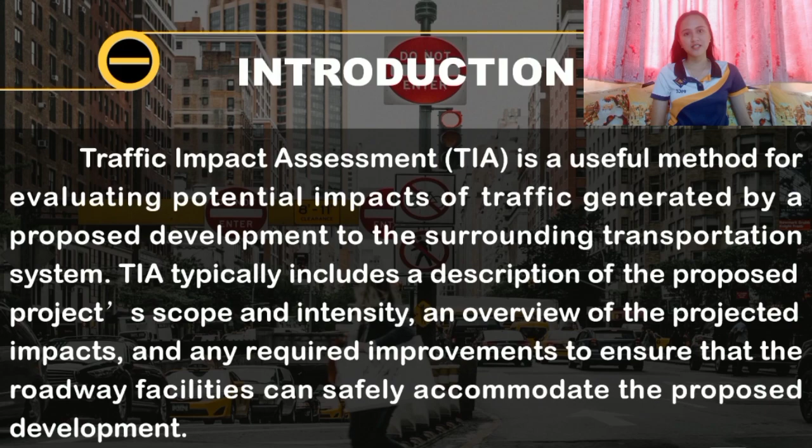A well-prepared TIA helps the developer and permitting agency update traffic data, relate land use decisions to traffic conditions, utilize money allocation more effectively, and estimate the traffic impacts of a proposed development by creating reasonable future traffic volumes for design purposes.

It also helps assess whether modifications are required to accommodate background traffic as well as traffic from a projected development, and lastly, provides a basis for determining the developer's responsibility for specific off-site improvements.

So a well-prepared TIA serves as a comprehensive tool for assessing and addressing the potential traffic implications of a development, promoting safety, compliance, and efficient use of transportation infrastructure.

The main objective of traffic impact assessment is to determine whether a certain development project will have an effect on the efficiency and safety of adjacent roads. It lays the path for further investigation and development of traffic management plans that help minimize traffic congestion.

The TIA considers not only traffic impacts such as road network efficiency and safety, but also the impacts on all road users, including public transport users like pedestrians and cyclists. The TIA considers both impact on operations and physical impacts on transport infrastructure.

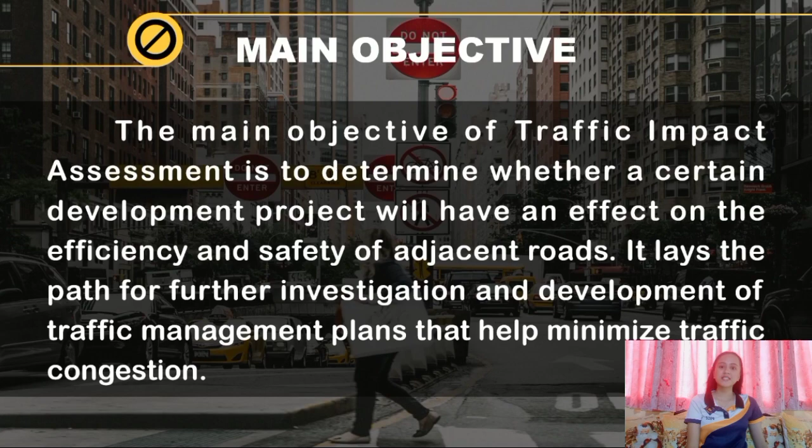Any development needs to have adequate infrastructure to support it, whether utilities or transportation. As a result, every proposed development requires an assessment of the adequacy of the site and any necessary improvements to safely accommodate the proposed development.

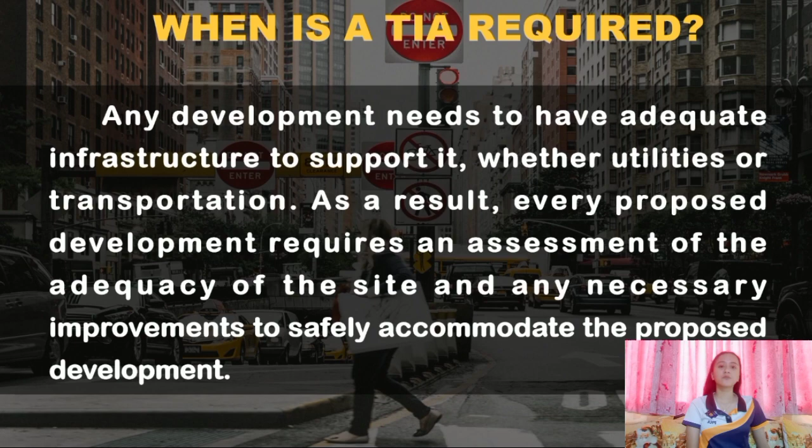In general, there are two levels of assessment that may be required in support of a development. The comprehensive report, which is used for larger developments with significant traffic impacts or at complex locations where the recommended improvements require a detailed analysis.

And the memo report, which may be used for small developments with low traffic impacts at simple locations where the recommended improvements can be assessed in a memo format.

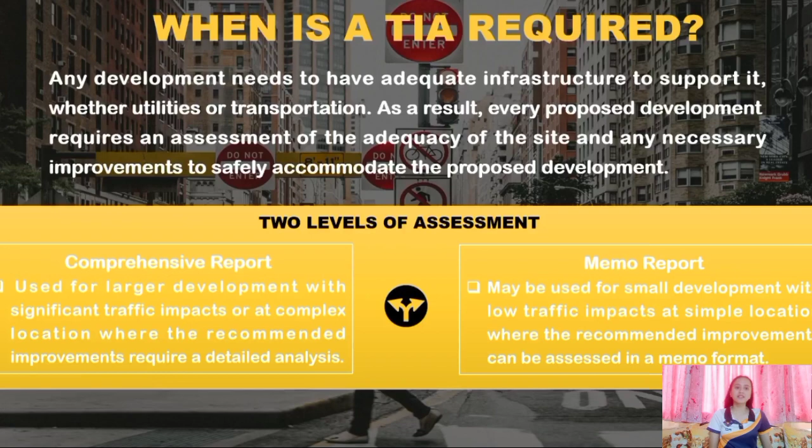Typically, a subdivision, pre-development plan, or development that potentially generates high traffic volume requires a comprehensive TIA, while if the anticipated traffic impact is low, a memo report may be sufficient.

Before a developer can make adjustments to a municipality's land use, subdivision, site, or driveway plan, a TIA must be submitted. If a TIA is not required, it is at the discretion of the city or municipal planning development office to mandate a traffic operation study to address local transportation issues.

To obtain specific TIA requirements, developers must engage with the relevant agencies, which include the Department of Public Works and Highways, the Department of Transportation and Communication, the Metro Manila Development Authority, and the local government unit.

As the TIA is often conceptual in nature and relies on many assumptions, its assumptions may need to be verified from time to time when new or additional information becomes available.

The acceptance of a TIA should not be viewed as final, as subsequent updates to the TIA may be required. Since the TIA is a technical document that other studies and approvals rely on, it needs to be as accurate as possible. A TIA outlines engineering judgments and recommendations.

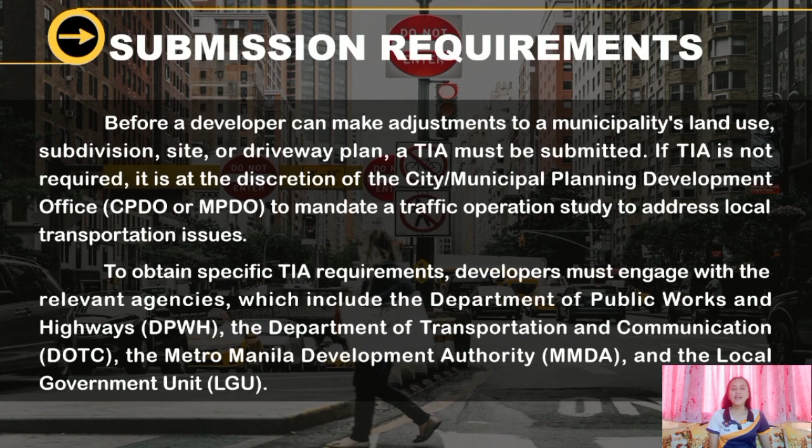Therefore, a TIA must be signed off by a qualified professional transportation engineer. An unsigned TIA is not acceptable and will not be reviewed.

Traffic impact assessment involves a systematic process to evaluate the potential impact of a proposed development on the existing transportation infrastructure and traffic conditions.

It involves site visits and base data collection, like traffic counts, pedestrian counts, road measurements, sight distances, traffic speeds, sidewalks, and street lighting.

It defines the study area and road network within the study area, assesses the existing traffic and road safety conditions on the road network in the study area, reviews the development or change in road network that will result in change in traffic flows, estimates the volume of traffic that the new development will generate and distributes this traffic onto the surrounding road network, adds the additional traffic to existing traffic and assesses the impact.

It assesses the impact of this additional traffic on the road network within the study area, calculates the forecast traffic volume, adds the additional traffic to the forecast traffic and assesses the impact, establishes the mitigation measures required to address the impact of the additional traffic for existing and forecast traffic conditions.

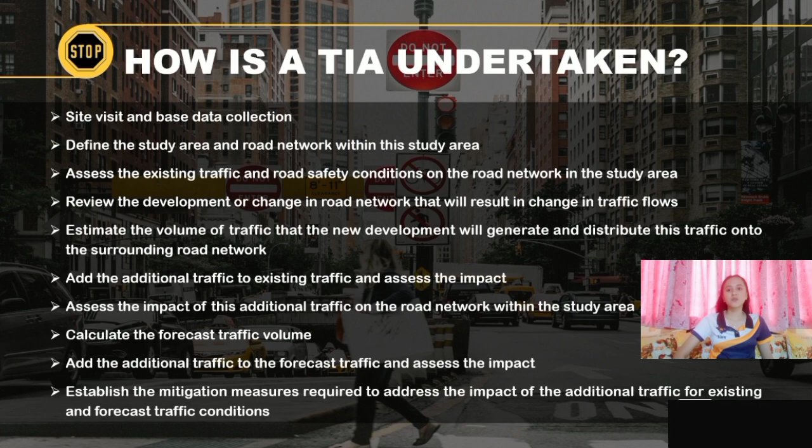It's essential to note that the requirements for a TIA can vary based on local regulations and the nature of the proposed development. Consulting with local planning authorities and transportation agencies is crucial to ensure compliance with specific guidelines and requirements in a given jurisdiction.

Land use is under municipal jurisdiction. Therefore, all TIA correspondence should involve the municipality. This ensures that any decisions or changes related to land use can be properly addressed and regulated by the local governing body. It also helps maintain consistency and accountability in managing land development projects within the municipality.

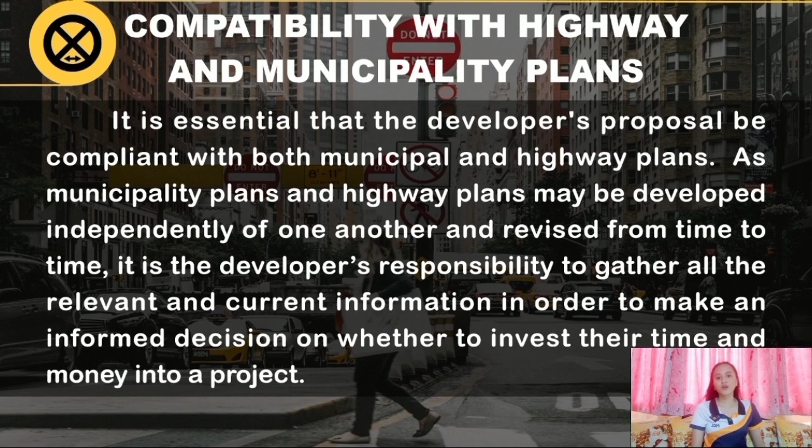It is essential that the developer's proposal be compliant with both municipal and highway plans. As municipality plans and highway plans may be developed independently of one another and revised from time to time, it is the developer's responsibility to gather all the relevant and current information in order to make an informed decision on whether to invest their time and money into a project.

It is advised that before starting any TIA work, the required scope, acceptability of the access locations, assumptions, methodology, expectations, and requirements be determined in order to prevent doing any needless work. A scoping meeting with the municipality would be helpful to discuss the proposed development plan to determine whether a TIA is required or not and the scope of the study for the upcoming TIA.

The developer and its consultant should discuss whether the municipality is willing to consider changing the usage of an existing access or creating a new one.

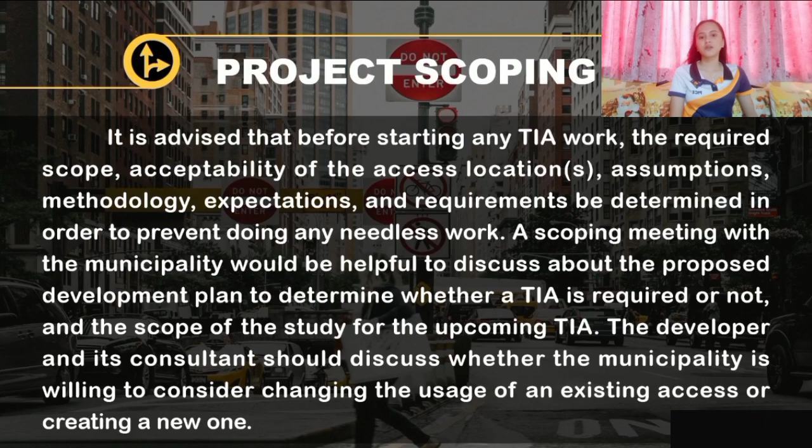As a TIA is often based on many assumptions, to achieve an acceptable TIA while minimizing the number of revisions, all such assumptions should be agreed to by the reviewing parties before conducting the TIA. The reviewer may have a certain preference or limitation in regard to analysis tools that should be confirmed as well.

The report should be concise, organized in a step-by-step approach, and easy to verify and comprehend. Any assumptions must be justified and backed up by sufficient evidence. The suggested study format will help ensure consistency among various studies and help enhance the efficiency of the report review process.

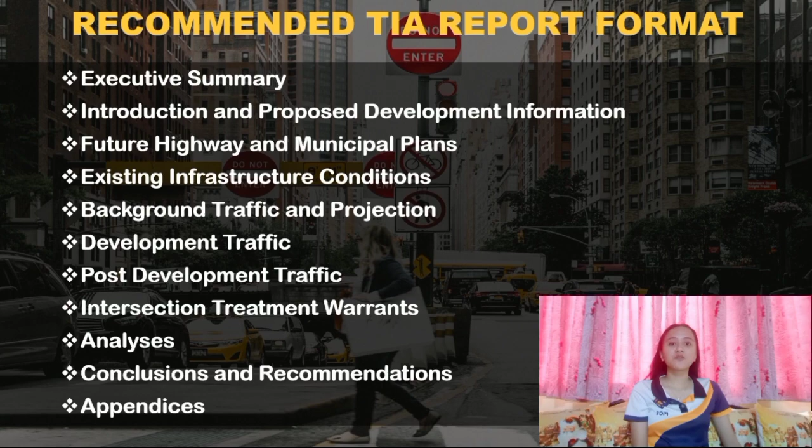The format includes an executive summary, introduction and proposed development information, future highway and municipal plans, existing infrastructure conditions, background traffic and projection, development traffic, post-development traffic, intersection treatment warrants, analysis, conclusions, and recommendations, including the proposed intersection plans, appendices, scoping and supporting documents, calculations, correspondence, etc.

The report content will be discussed further by my groupmates.

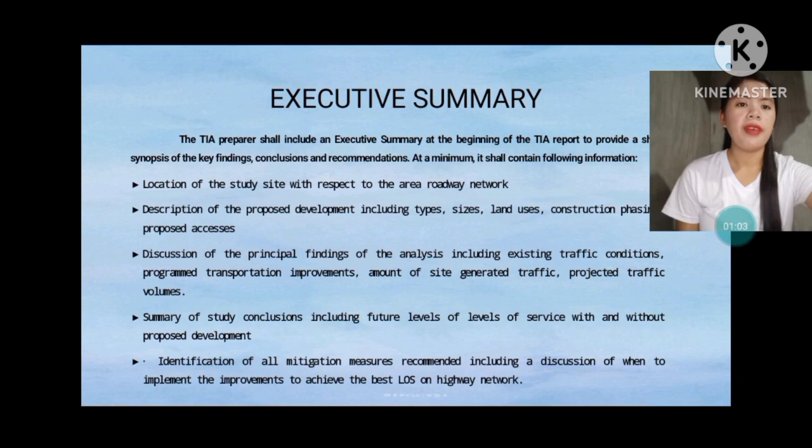Third is the discussion of the principal findings of the analysis, including existing traffic conditions, programmed transportation improvements, amount of site-generated traffic, and projected traffic volumes.

The fourth one is the summary of the study conclusions, including future levels of service with and without proposed development. Then, identification of all mitigation measures recommended, including a discussion of when to implement improvements to achieve the best level of service on the highway network.

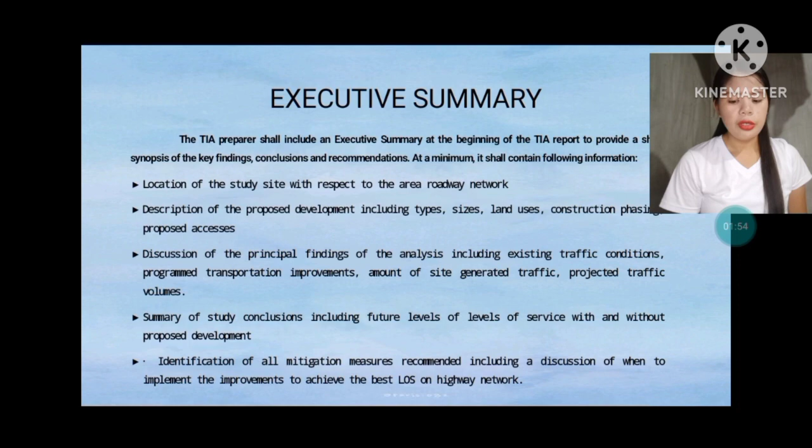When we say LOS, it means level of service, which is widely used in transport planning to evaluate problems and potential solutions. It also influences transport planning decisions.

Next is the introduction and proposed development information. The introduction of background information is to provide understanding of the proposed development and its location with respect to the provincial highway system. This portion of the report should provide the following information.

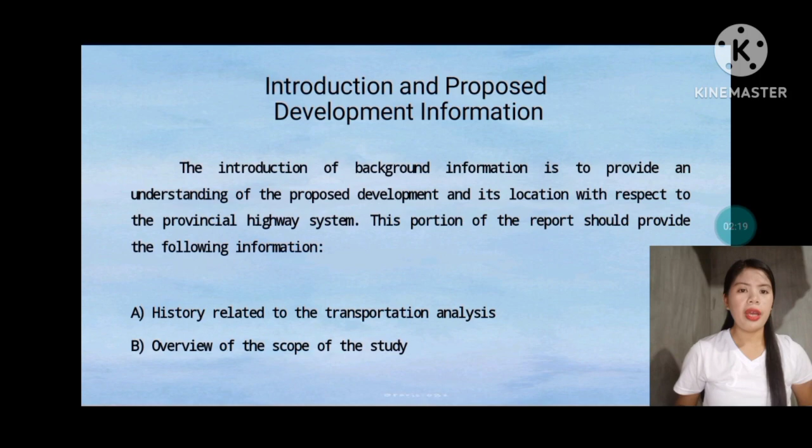A is the history related to the transportation analysis. Transportation analysis provides the basis for transportation planning. B is the overview of the scope of the study.

A Traffic Impact Assessment, or TIA, is a study that evaluates the effects of a proposed development or land use change on the surrounding transportation network.

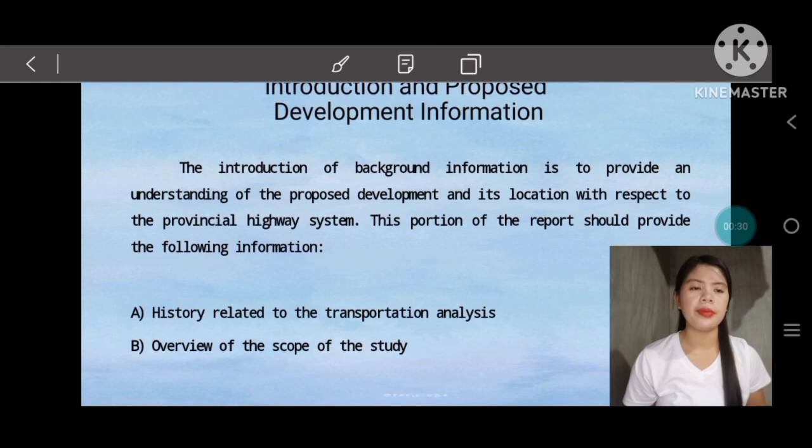Letter C, proposed development. In this part, there are two subcategories of proposed development: first is the on-site development, and second is the study area. Under on-site development is the name and location with legal land description of the proposed development.

The legal description identifies the property's geographic location and boundaries as determined by a surveyor. It also ensures that the correct property deed is transferred to the new owner and that the correct property ownership is recorded on the new deed.

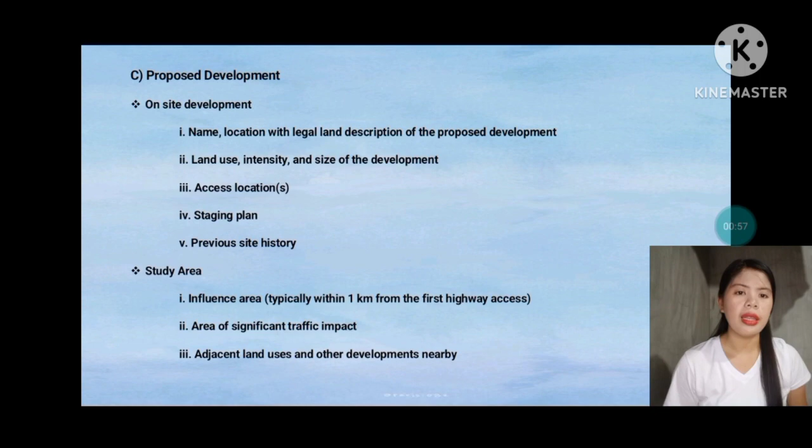While in the study area, we have the influence area, typically within 1 kilometer from the first highway access. Second is the area of significant traffic impact. And the third one is the adjacent land uses and other developments nearby.

Letter D is the existing road network. So the highway number or the control section and kilometer. Second is the highway service classification.

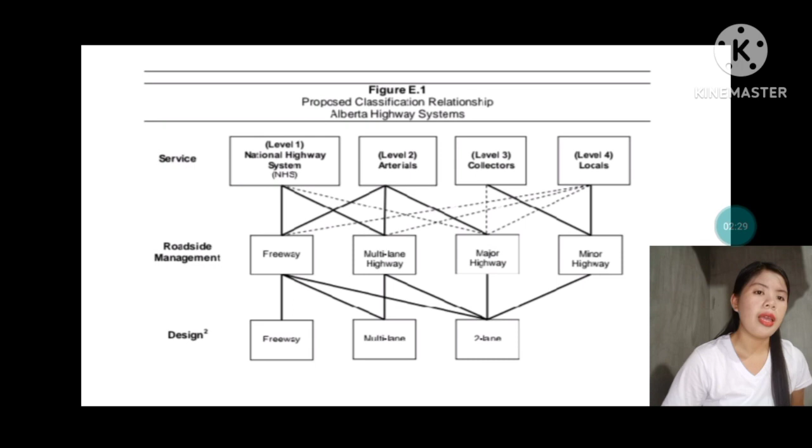For the design of roadside management, the freeway is under freeway, multi-lane, and two-lane. For the roadside management multi-lane highway, it is under multi-lane and two-lane design, while the major highway is only under two-lane, same as the minor highway of roadside management.

As you can see in the picture, we have a sample of a roadside management classification map.

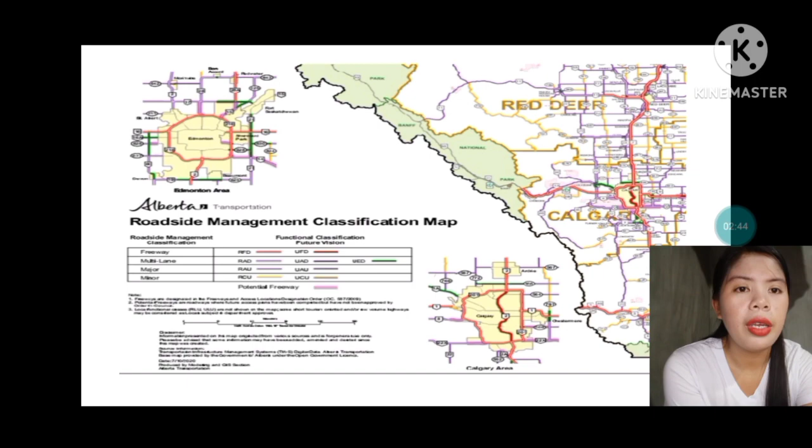So for letter E, maps and plans, we have two plans: the site location plan and the site plan. We have an example picture here.

As you can see, the difference between the location plan and the site plan: a location plan must be based on an up-to-date map and at a recognized standard metric scale, and must illustrate the plan development in relation to its adjacent properties. This is the sample picture.

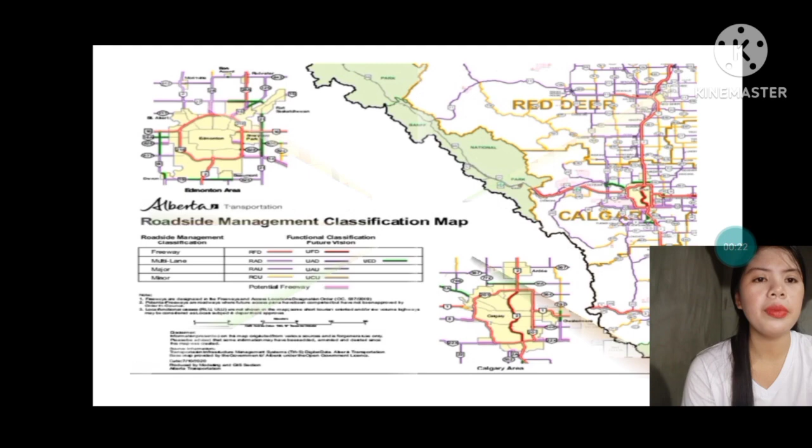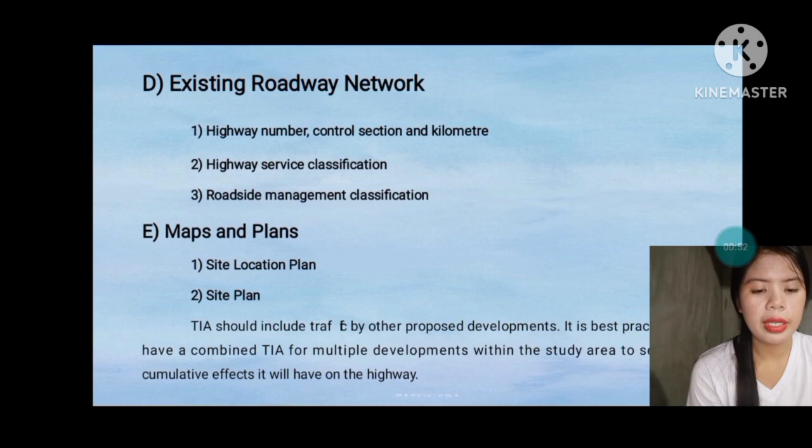The site plan, also known as block plans or plot plans, shows the intended development location in respect to the property boundaries. They are most often submitted in either a 1:200 or 1:500 scale. Here is the sample picture, these two. Site plan at 1:500 scale.

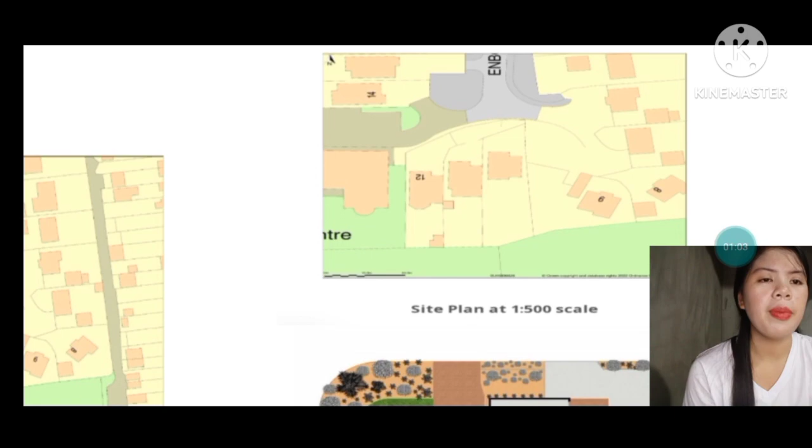For access management, highway and municipal: access management is the planning, design, and implementation of land use and transportation strategies that control the flow of traffic between the road and surrounding land.

A TIA is not only an operations assessment, but also a planning exercise. All development plans need to be compatible with the municipality and highway plans. Understanding the existing and future plans within the study area is essential to evaluating the impacts of the development site.

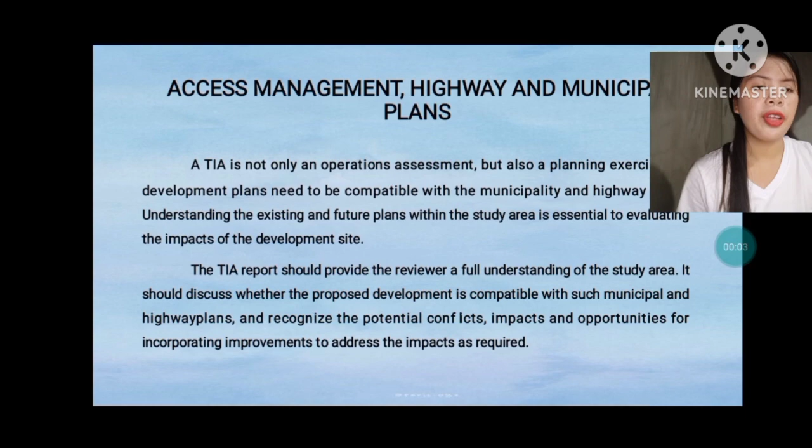The TIA report should provide the reviewer a full understanding of the study area. It should discuss whether the proposed development is compatible with such municipal and highway plans, and recognize the potential conflicts, impacts, and opportunities for incorporating improvements to address the impact as required.

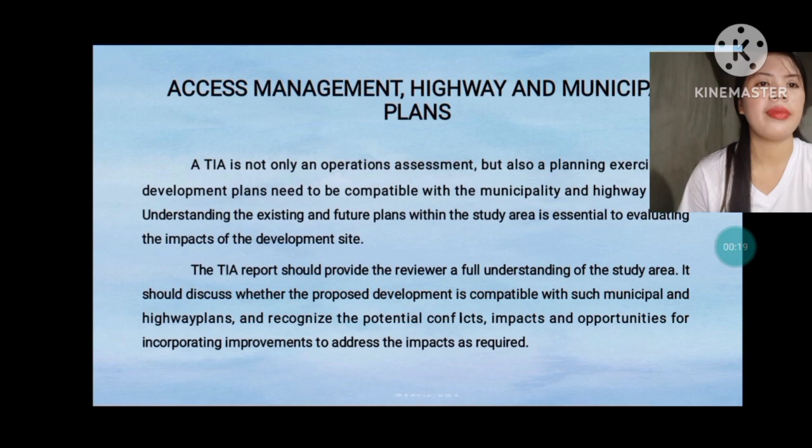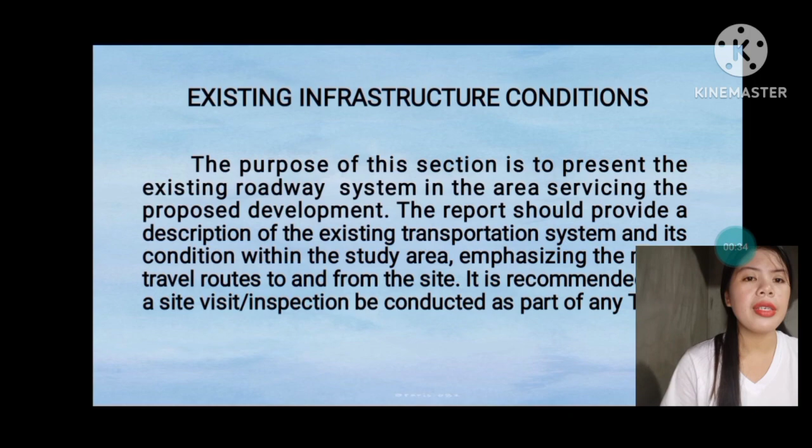In the existing infrastructure condition section, the purpose is to present the existing roadway system in the area servicing the proposed development. The report should provide a description of the existing transportation system and its condition within the study area, emphasizing the major travel routes to and from the site.

It is recommended that a site visit or inspection be conducted as part of any TIA.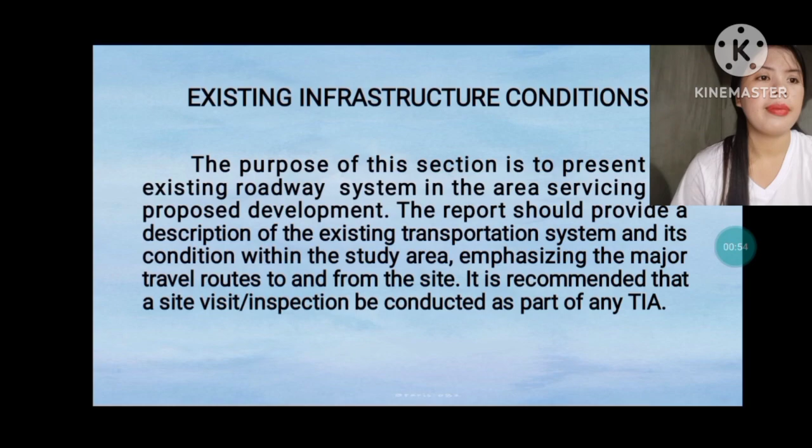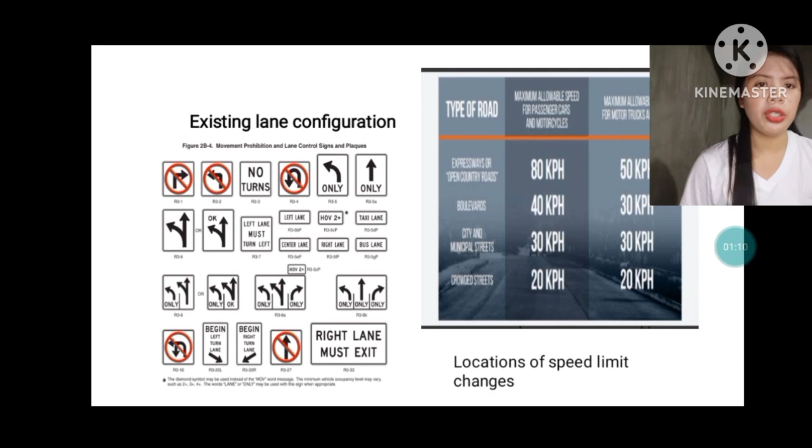Existing highway and road conditions: we have the existing lane configurations. Let me show you the picture. Here, the first picture, as you can see, there were signs for the existing lane configuration.

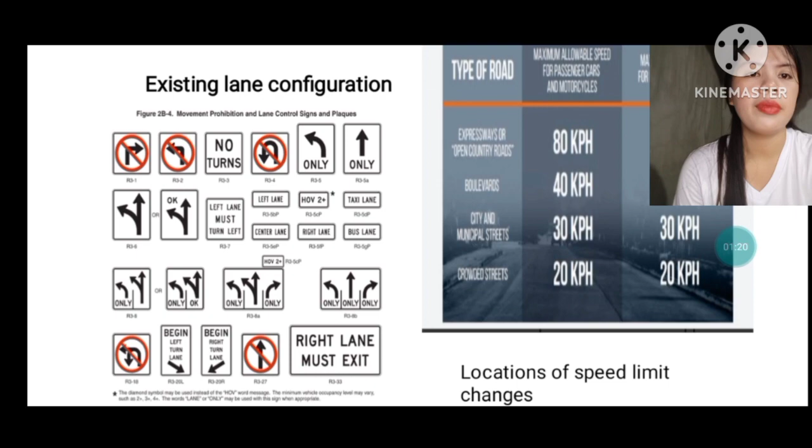Design and posted speed limit of the highway and the intersecting roadway. Then, the location of speed limit changes.

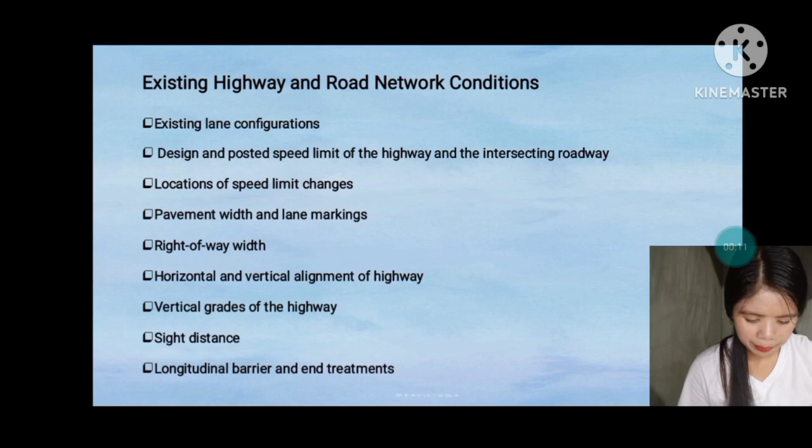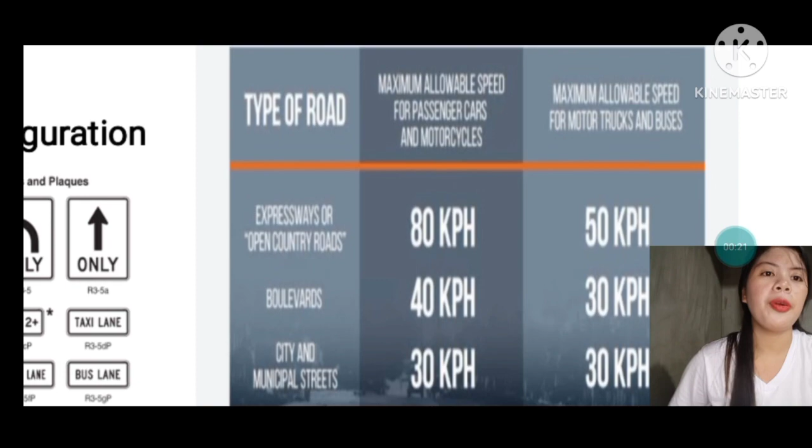So here we have the type of road, the maximum allowable speed for passenger cars and motorcycles, and the maximum allowable speed for motor trucks and buses. When it comes to expressways or open country roads, 80 km per hour is the maximum allowable speed for passenger cars and motorcycles, while 50 km per hour for motor trucks and buses.

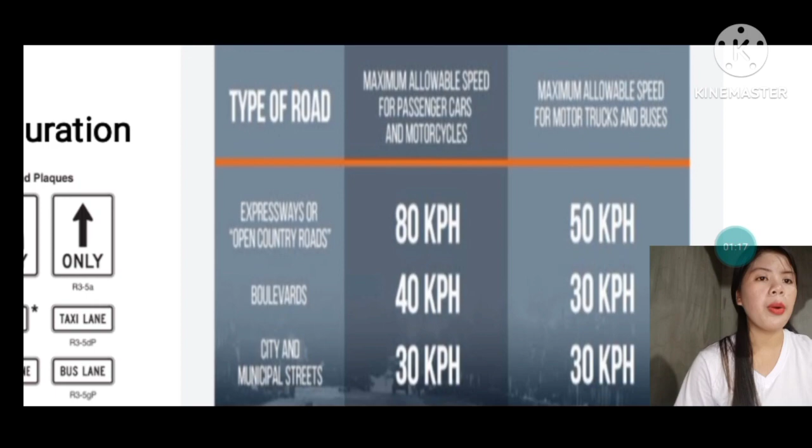When it comes to boulevards, the maximum allowable speed for passenger cars and motorcycles is only 40 km per hour, while for motor trucks and buses it's 30 km per hour. When it comes to city and municipal streets, it's 30 km per hour for passenger cars and motorcycles, and 30 km per hour for motor trucks and buses.

For the locations of speed limit changes, the speed limit zone area becomes effective at the point you reach the sign. If the speed limit sign or zone changes to a slower speed, slow down before the sign and not after. If the speed limit changes to a higher speed, wait until you get the increased speed limit sign before increasing your speed.

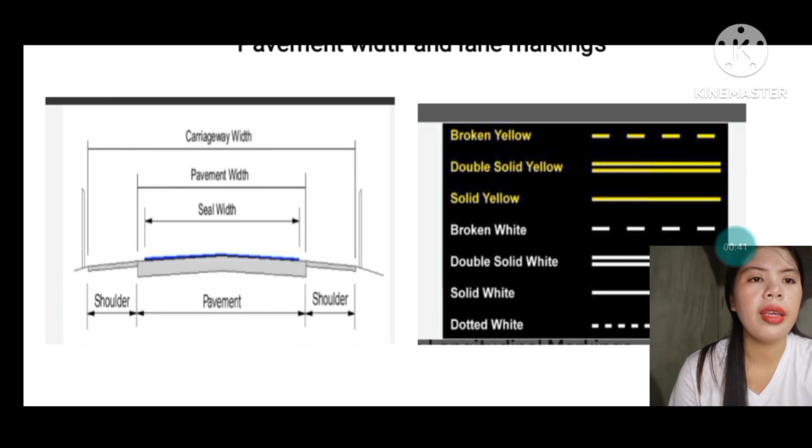Next is the pavement width and lane marking. We have pictures here showing two things: one for the pavement width and one for the lane markings. You can see the pavement width at the middle of the carriageway width and the seal width, and both sides is the shoulder.

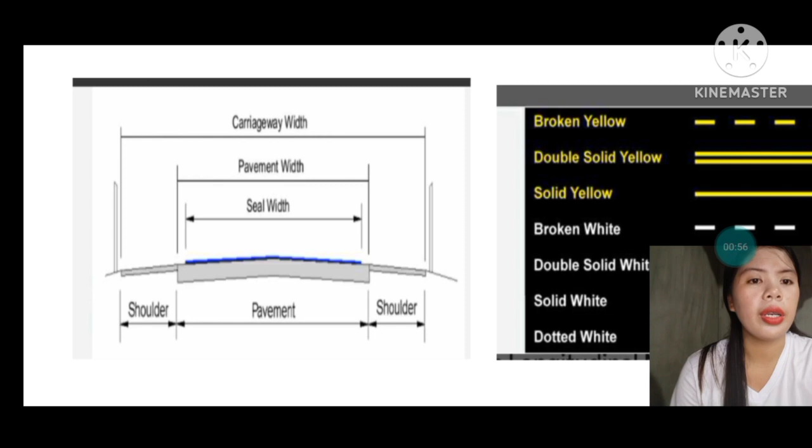For the lane markings, we have the broken yellow, double solid yellow, broken white, double solid white, and dotted white lines. A solid yellow line indicates that passing is prohibited. A dashed yellow line indicates that passing is allowed, while white lines separate lanes for travel in the same direction. A double white line indicates that lane changes are prohibited, while a single white line indicates that lane changes are discouraged.

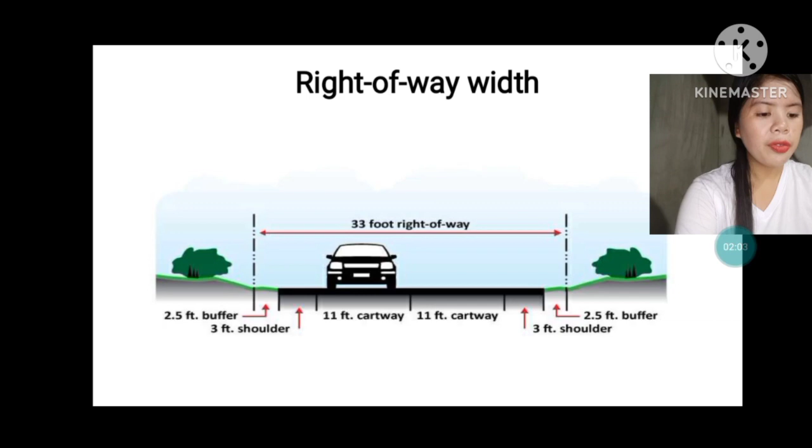Next is the right-of-way width. As you can see in the picture, we have a 33-foot right-of-way. The width of the right-of-way in the Philippines, according to the National Road, shall have a right-of-way not less than 20 meters, provided that such minimum width may be reduced at the discretion of the Minister of Public Highways to 15 meters in highly urbanized areas.

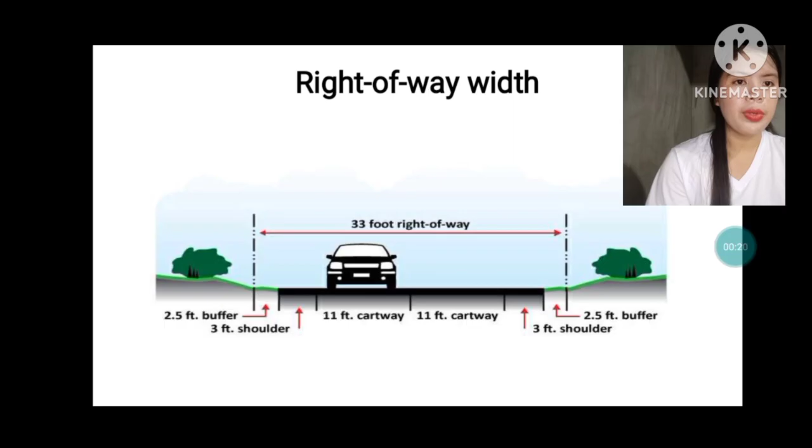And that a right-of-way of at least 60 meters shall be reserved for roads. Next is the horizontal and vertical alignment of highway. As you can see in the picture, we have the horizontal alignment in plan view and the vertical alignment in profile view. The horizontal alignment of a roadway is defined in terms of straight line tangents and horizontal curves. The curves allow for a smooth transition between the tangent sections. Circular curves and spirals are two types of horizontal curves utilized to meet the various design criteria.

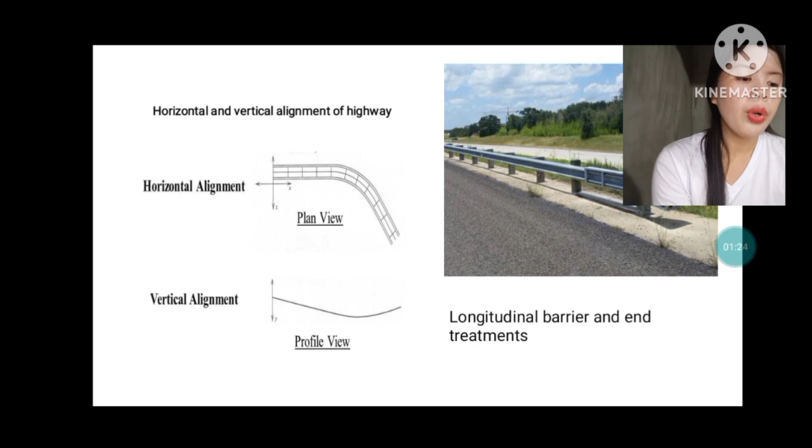For the vertical alignment of the highway, it is generally defined as the presence of height and depth in the vertical axis with respect to the horizontal axis of alignment. These heights and depths in roads may be in the form of gradients, or straight lines in a vertical plane, or vertical curves.

Then for the vertical grades of the highway: the vertical profile grade is the percent of elevation change along the center line of the roadway. Vertical grades are necessary to assure drainage of storm water within the plaza to inlets and or outfall locations. Vertical curves, also known as grade curves or sag curves, are gradual changes in the slope of a roadway or railroad track along the vertical axis. They are used to transition between different grades or slopes smoothly and safely.

For the sight distance, this is already very familiar to us since our teacher already discussed this one. Stopping sight distance is one of several types of sight distance used in road design. It is a near worst-case distance a vehicle driver needs to be able to see in order to have room to stop before colliding with something in the roadway, such as a pedestrian in a crosswalk, a stopped vehicle, or road debris.

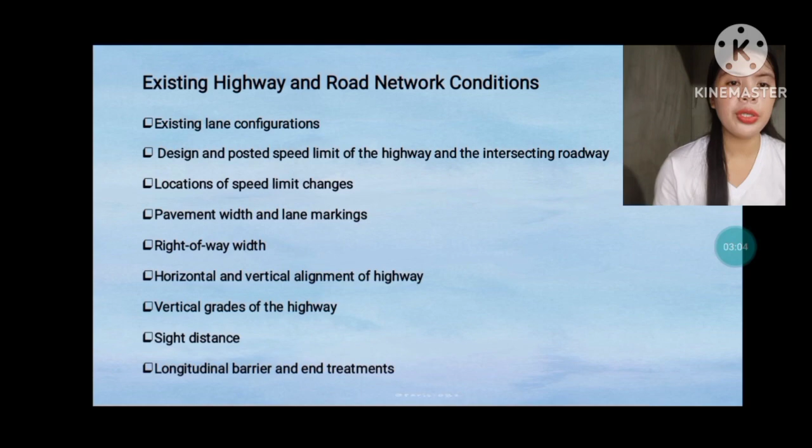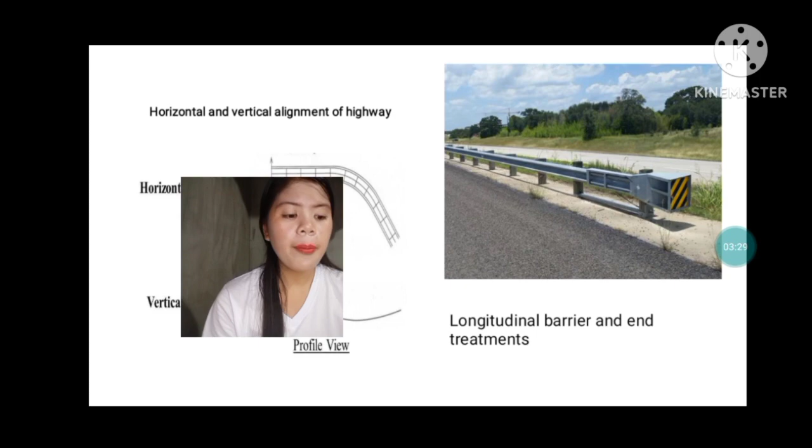This is the longitudinal barrier and the end treatments. As you can see in the picture, there are the end treatments. The end treatments are a critical component of any barrier system whose primary function is to increase the safety of occupants of an errant vehicle impacting a barrier or roadside hazard by absorbing the kinetic energy of an impact.

So next is the hazard in the clear zone. When located within the clear zone, these continuous hazards are roadside hazards. The length of the hazard increases the likelihood an errant vehicle will strike it, and some hazards have a high crash severity regardless of the speed of the errant vehicle. A clear zone is an unobstructed, traversable roadside area that allows a driver to stop safely or regain control of a vehicle that has left the roadway.

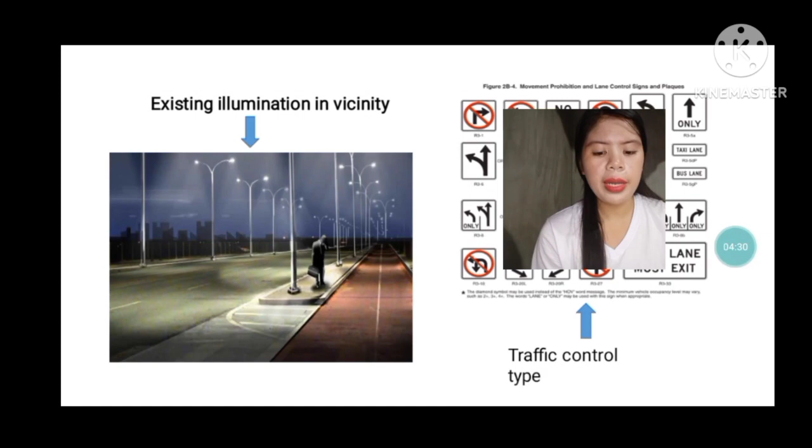Next is the existing illumination in vicinity. Let me show you a picture. Here it's like street lights. It is the area illuminated by lighting in certain areas of the site plan.

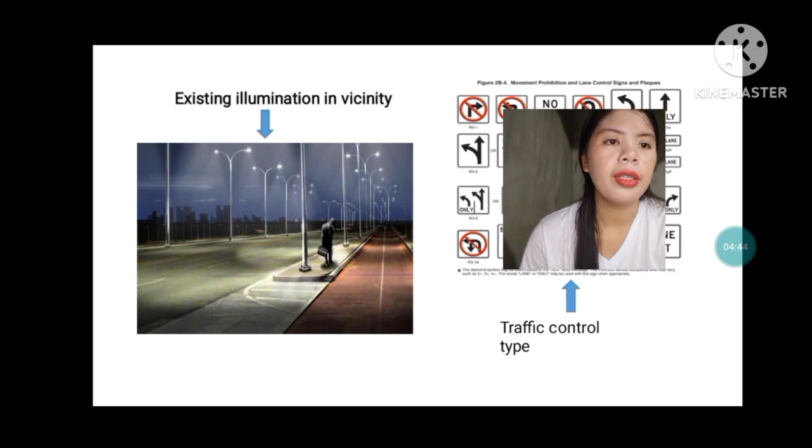Then the traffic control type. Here is the picture. As you can see, there were lots of signs for the traffic control type. First is the signs, so we've all seen road signs. It is how we get information as drivers, pedestrians, and general road users. Signs are used to indicate changes in the speed restriction.

The road itself is used as a different kind of traffic safety device. On the pavement, curb, sides of islands, or on nearby permanent objects, there are road markings in the form of lines, patterns, words, reflectors, or symbols.

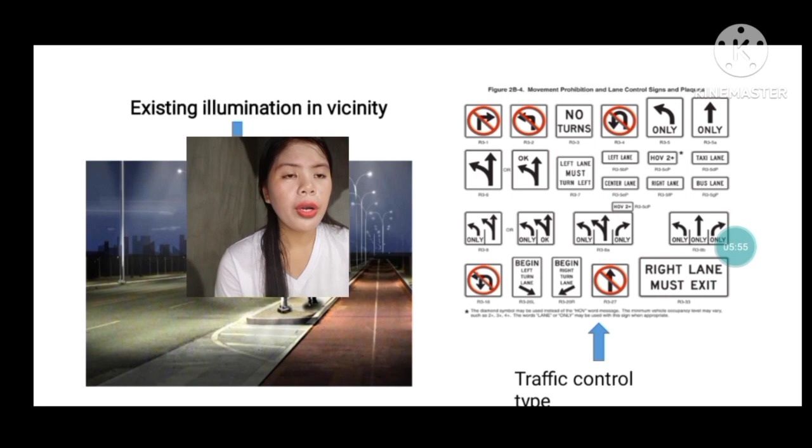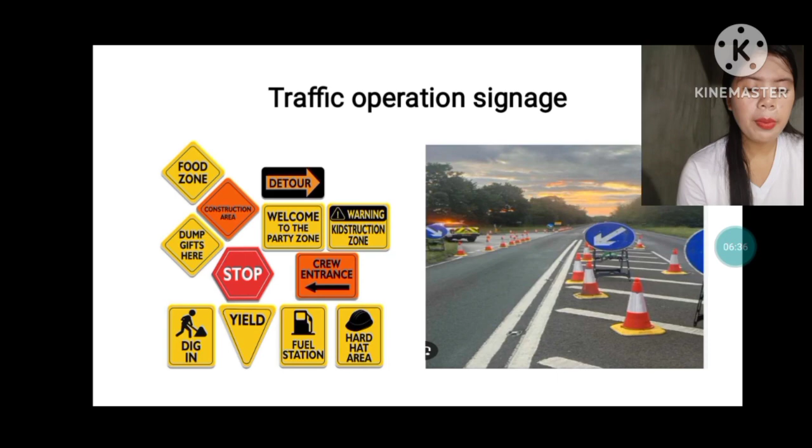For the traffic operation signage, you can see those things on the figure. The red generally means the use of red on signs is limited to stop, yield, and prohibition signs. A white background indicates a regulatory sign, while the yellow background conveys a general caution message, while the green shows permitted traffic movements or directional guidance.

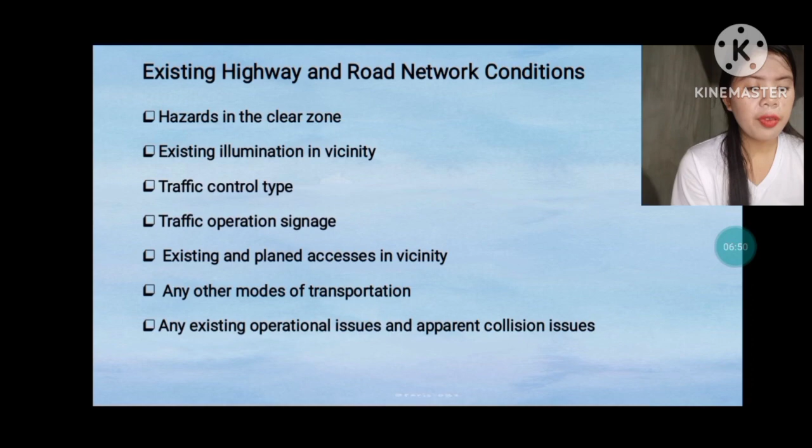Existing and planned accesses in vicinity. Examples for that are the driveways, frontage roads, and the private roads.

Next is any other modes of transportation. Examples of that are the railway, pedestrian crossing, trail, bicycle lanes, transit roads, and stops. And the last thing is any existing operational issues and apparent collision issues.

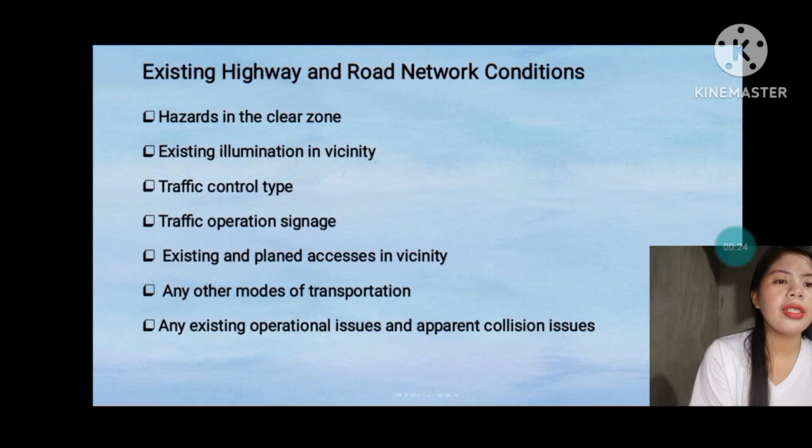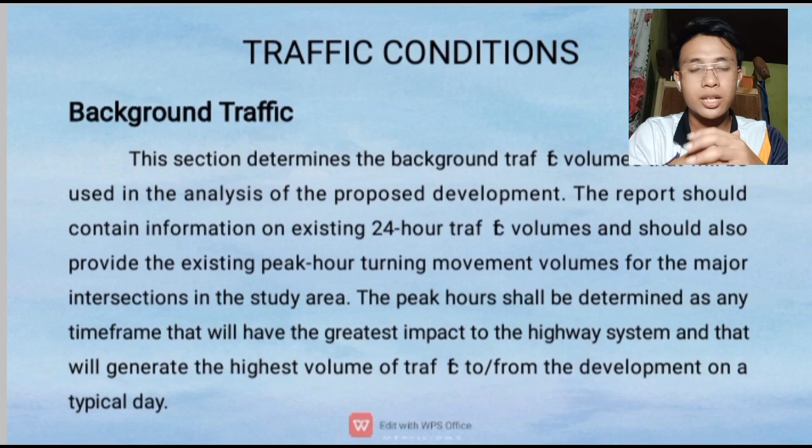The traffic condition, the background of the traffic. This section determines the background traffic volumes that will be used in analysis of the proposed development. The report should contain information on existing 24 hour traffic volumes and should also provide existing peak hour turning movement volumes for the major intersection in the study area. The peak hour shall be determined as any time frame that will have the greatest impact to the highway system, and this will generate the highest volume of traffic from the development that day.

So the existing background traffic, the objective of this traffic count is to capture the true demand. We need to always monitor the traffic condition since in every intersection there is always a possibility of traffic.

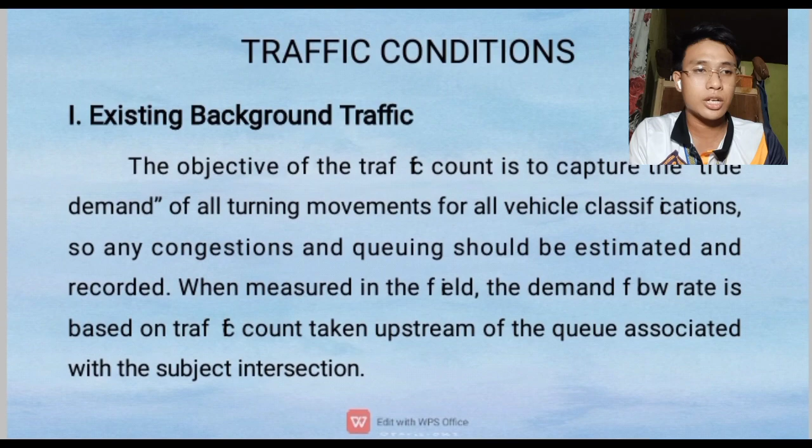So of all turning movements for all vehicle classifications, any congestion and queuing should be estimated and recorded. When measured in the field, traffic count is taken upstream of the queue associated with the subject intersection.

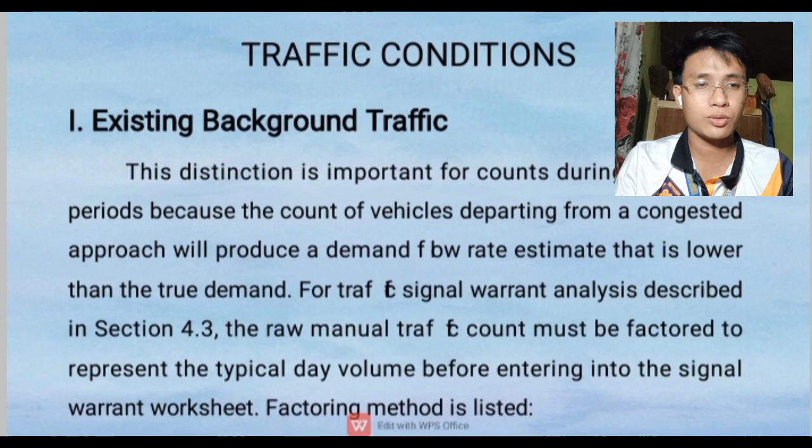So the traffic condition during the signal warrant worksheet, we need to factor the method listed. So scenario 1, the traffic count was collected in a day.

Factor equals AADT in the count year over ATR 24 hours daily volume on the count day. So when you factor it for the current year, it equals the raw traffic count times factor times 1 plus growth rate percent times number of years.

Sometimes in our monitoring of traffic, scenario 2 applies: the traffic count is collected in the current year where ATR 24-hour count and the AADT for the current year are not available. So factor equals AADT in last year over ATR 24 hours daily volume on the count date in last year.

So when the pedestrian demand is present at a study intersection, or where pedestrian traffic accommodation is anticipated, pedestrians should also be collected.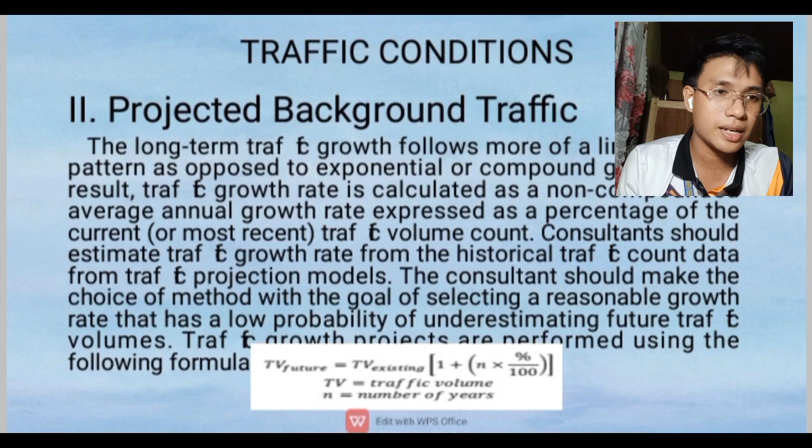So the growth projections are performed using a formula. TV future equals TV existing times 1 plus the number of years times percent over 100.

When the traffic growth rate is dynamic, different growth rates may be used for different development horizons in order to simulate the traffic growth trend. However, justification must be provided. Although traffic growth rates vary for every section of highway, the average annual non-compounded growth rate on the provincial highway network is about 1.5 to 2.0% from year to year.

If there is not sufficient traffic count data to determine the traffic growth rate, and historical traffic indicates negative or low growth, for the purpose of the Traffic Impact Assessment, an average annual non-compounded growth rate of 2% should be used as a lower limit for provincial highways.

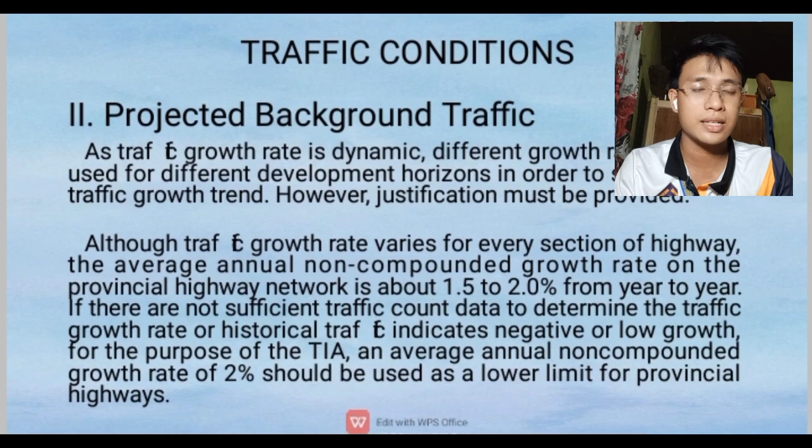The traffic projection must be prepared for the build year or such other years as may be appropriate due to development staging. So the background traffic should be projected to a minimum 20-year horizon, as this represents the average life of most pavement structures.

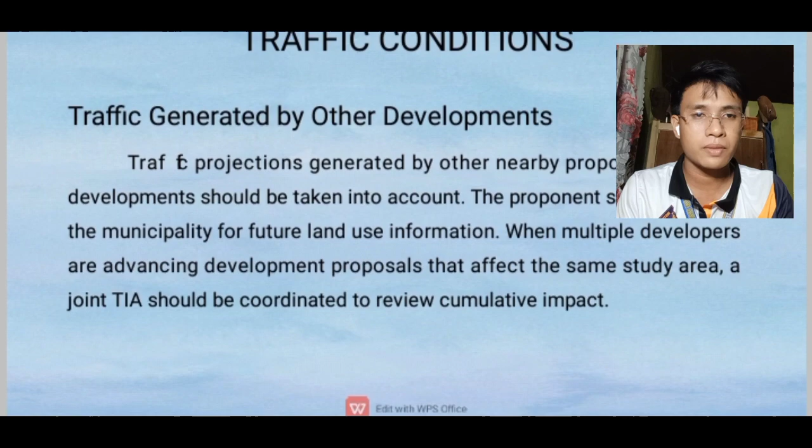Once the development traffic has been identified, the projected background traffic, other development traffic, and site generated traffic should be combined for the determined peak periods. The combined traffic should be projected at least 10 to 20 years horizon, from the commencement day of each development stage. This information should be supplied in graphical and tabular form.

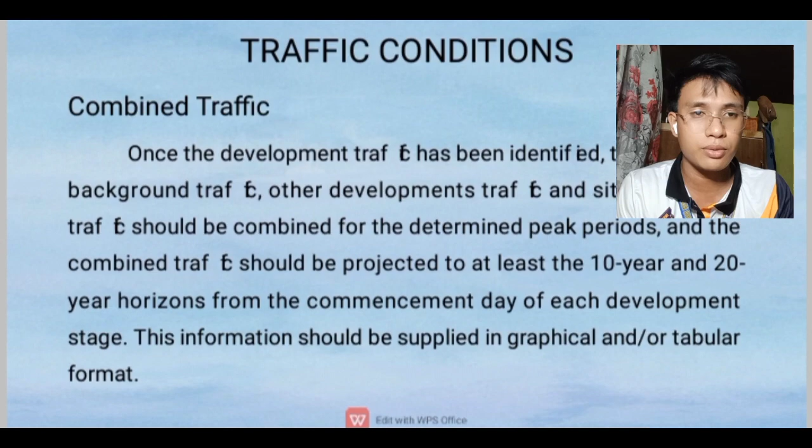Intersection treatment warrants should follow the current trans highway geometric design guide, HGDG, and any related design bulletins. The intersection treatment warrant system has been prepared to assist designers in choosing the appropriate intersection treatment based on the main and intersecting road volumes.

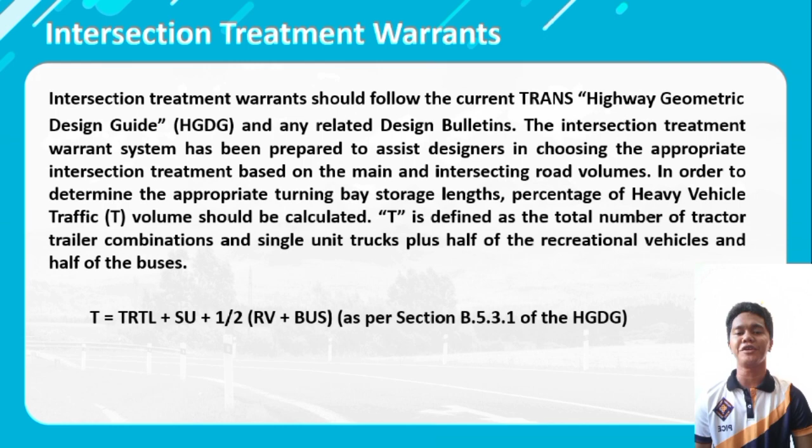In order to determine the appropriate turning bay storage lengths, the percentage of heavy vehicle traffic volume should be calculated. T is defined as the total number of tractor-trailer combinations and single unit trucks, plus half of the recreational vehicles and half of the buses.

Next is intersection treatment for over-dimensional vehicles. When over-dimensional loads are involved, designers should take into consideration some of the guidelines in Design Bulletin 68, where intersection adjustments such as semi-mountable curbs, location, offsetting of road appurtenances, clearance heights, etc. may be required.

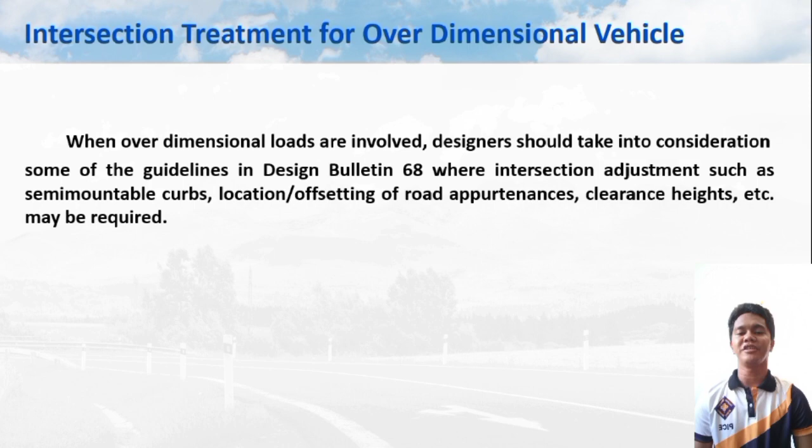Next is capacity analysis. Capacity analysis must be undertaken for all traffic scenarios as appropriate, such as signalized and unsignalized intersections, roundabouts, weaving, merging, diverging, queuing analysis, intersection traffic controls, etc., as per the Transportation Research Board Highway Capacity Manual, or HCM.

Both intersection treatment warrant and capacity analysis for existing conditions and future conditions need to be performed and satisfied. In cases where the proposed development utilizes an existing intersection, it is necessary to first understand how the existing highway and/or intersection would operate without the development.

The TIA should include intersection treatment warrant and capacity analysis for the existing intersection for the commencement day, 10-year, and 20-year horizon without development traffic.

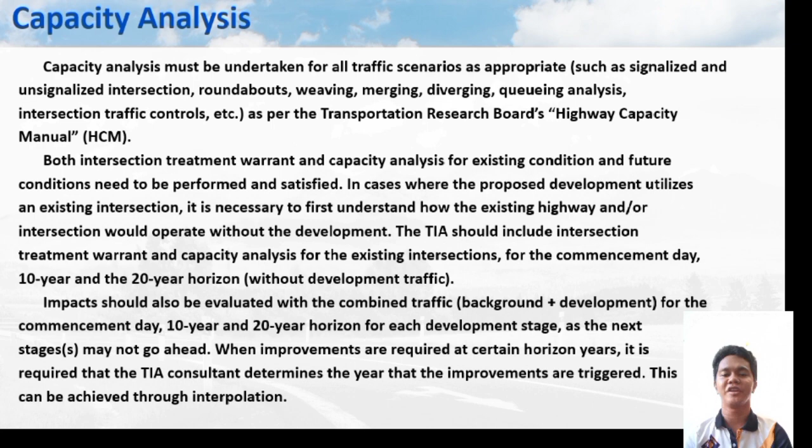Impact should also be evaluated with the combination of traffic background plus development for the commencement day, 10-year, and 20-year horizon for each stage, as the next stages may not go ahead. When improvements are required at certain horizon years, the TIA consultant must determine the year that the improvements are triggered. This can be achieved through interpolation.

The TIA report should summarize capacity analysis results with but not limited to the following information for each analysis scenario: first, level of service by turning movement for each intersection; second, V over C ratio; third, delay per movement in seconds; and last, queue length in meters.

All intersection capacity analysis outputs, including but not limited to synchro files, traffic signal warrant sheet, and left turn and right turn warrant sheets, should be included in the appendix of the TIA report.

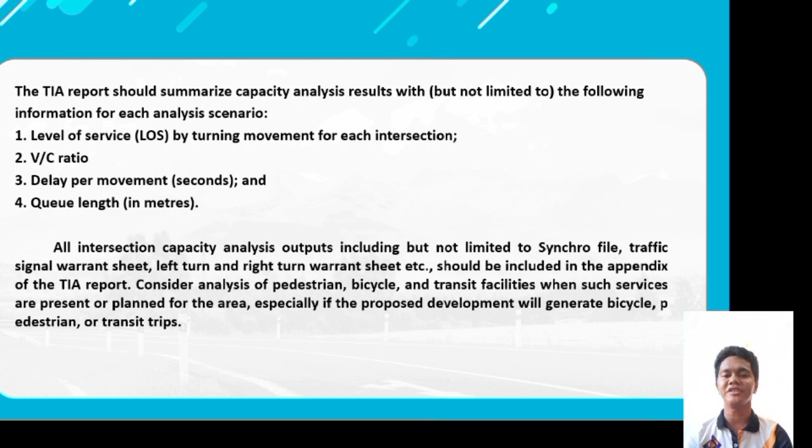Consider analysis of pedestrian, bicycle, and transit facilities when such services are present or planned for the area, especially if the proposed development will generate bicycle, pedestrian, or transit trips.

Next is traffic control needs. The TIA preparer should consult with Trans when considering traffic control and intersection type. Trans utilizes TAC's traffic signal and pedestrian signal head warrant handbook when determining the warrant of signalized intersections. Trans follows the 100-point system where collision risk is inherently considered with the Canadian traffic signal warrant matrix procedure.

In the traffic signal warrant sheet, the peak hour traffic count table should be filled with the highest 6 hours factored to a typical day traffic count: 3 hours in the morning and 3 hours in the afternoon. The hours do not need to be consecutive.

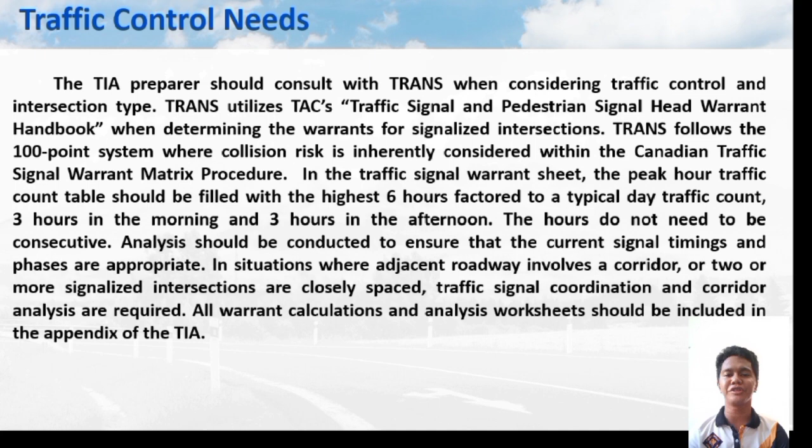Analysis should be conducted to ensure that the current signal timings and phases are appropriate. In situations where the adjacent roadway involves a corridor of two or more signalized intersections that are closely spaced, traffic signal coordination and corridor analysis are required. All warrant calculations and analysis worksheets should be included in the appendix of the TIA.

So now let's proceed to traffic safety. Safety of all road users must be taken into consideration during the preparation of the TIA. The report should identify and make recommendations regarding any geometric and operational issues that may impact safety, as well as any apparent collision issues.

For example, when there is significant concern for the development's effects on road safety, a more detailed traffic safety analysis is required.

Next is design vehicle accommodation. An assessment of design vehicle requirements is a critical phase of the TIA and must not be overlooked. As part of the intersection improvement analysis, it is necessary to ensure that the design vehicle is capable of safely maneuvering the intersection without interfering with other traffic movements.

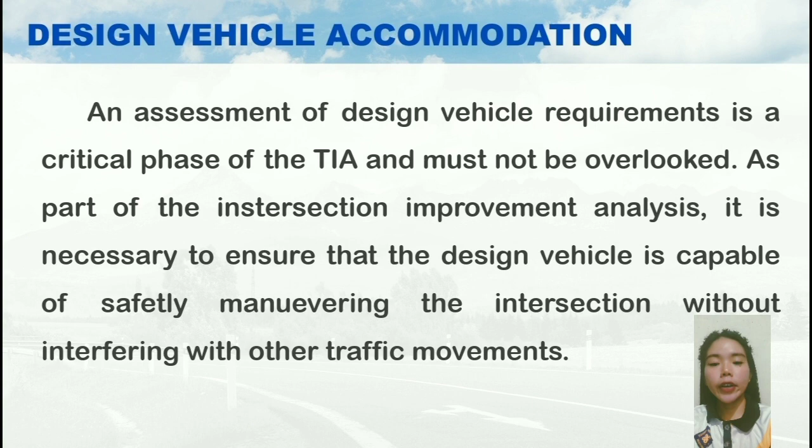An intersection and design vehicle's turning plans should be provided to demonstrate that the design vehicle for the existing and proposed development using the intersection can safely maneuver through the intersection and on the development site with appropriate turning room. The design must also accommodate storage for left turns off the main road or while waiting on the intersecting road, and review requirements particularly for the space between lanes on a divided highway.

The access management and rights of way section states that the TIA report must address improvements to the highway involving removal, relocation, or alteration of existing accesses to maintain minimum spacing and ensure highway safety under post-development conditions.

So if the location of an existing or proposed intersection is a concern - for example, insufficient intersection sight distances, intersection on grade or curve, insufficient access spacing, or proximity to adjacent intersections and accesses - the TIA consultant should evaluate access or corridor operations.

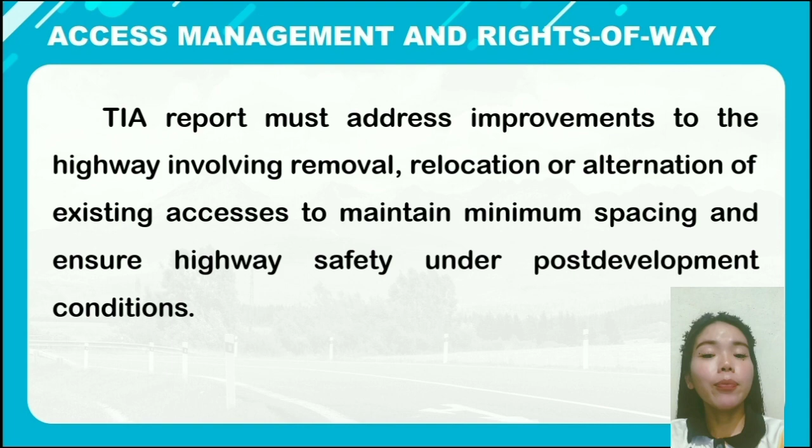Analysis, for example weaving analysis, and provide options such as alternate access, consolidation, or relocation of the proposed access, and discuss with the transportation authority prior to further analysis. A planning level intersection layout indicating the required right-of-way for the proposed development access is required.

For other considerations, impacts on noise and other modes of transportation may include traffic noise assessment, and mitigation by the development may be required. Any proposed improvement that does not meet transportation standards should refer to transportation design exception guidelines.

It is the TIA consultant's responsibility to clearly document any items that deviate from the current transportation standards and provide rationale for the recommended mitigation strategies. So that's all.